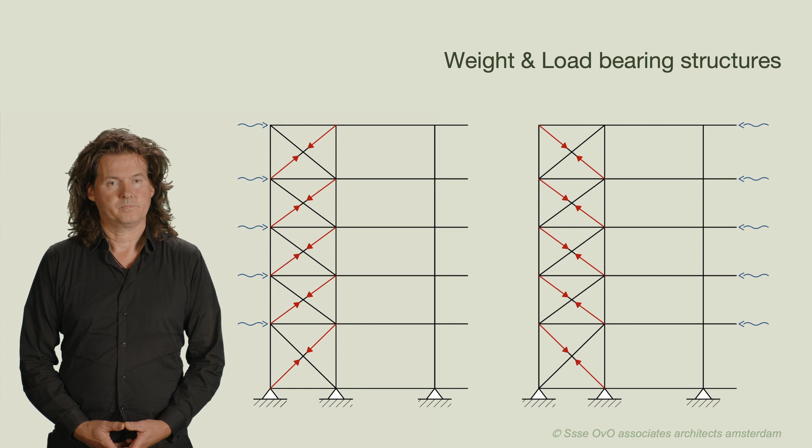Fire safety takes on a new level of complexity in high-rises. Very tall buildings have to be designed in such a way that there is a very low probability of fire spreading to upper floors and a very low probability of structural collapse at any time during a fire, regardless of whether or not the fire can be controlled by firefighting services and suppression systems.

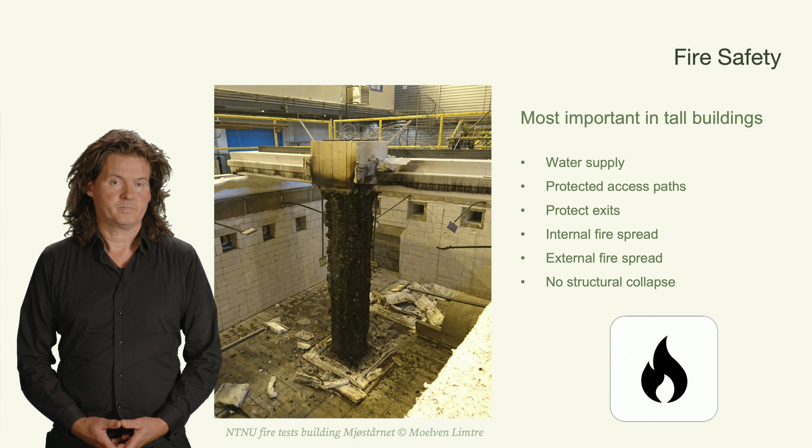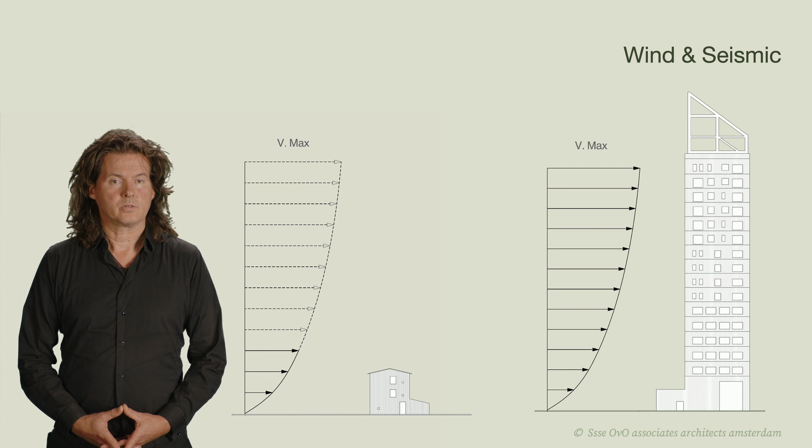In high-rise timber construction, engineering for wind and seismic forces is a major consideration. The taller the building, the more significant the wind loads, which can cause vibrations or even structural instability if not correctly addressed. Advanced simulations and material testing are essential for ensuring stability. Let's have a look at some case studies.

Treet, a 14-story timber apartment building located in Bergen, Norway. This structure stands as an excellent example of what's achievable with modern timber construction methods. In Treet, the assembly and structural systems are interlinked in an unconventional yet effective manner. Prefabricated building modules are stacked in groups of 4 stories each. These modules form the internal part of the building and are entirely self-contained. But they are not doing the heavy lifting.

Instead, the external glulam trusses, or the exoskeleton, take on the main load-bearing responsibilities. Once a stack of 4 modules is assembled, the exoskeleton is built up to receive and bear the load of the next set of 4 modules.

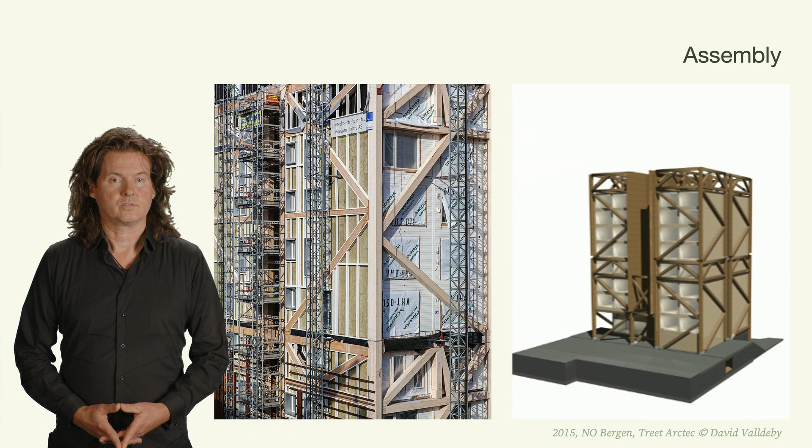The fire strategy for Treet is carefully crafted. The main load-bearing system is designed to withstand 90 minutes of fire exposure, going beyond the usual 60 minutes for secondary load-bearing elements. The 90-minute fire resistance is crucial because it ensures that a fire starting in any apartment will die out before spreading to other parts of the building.

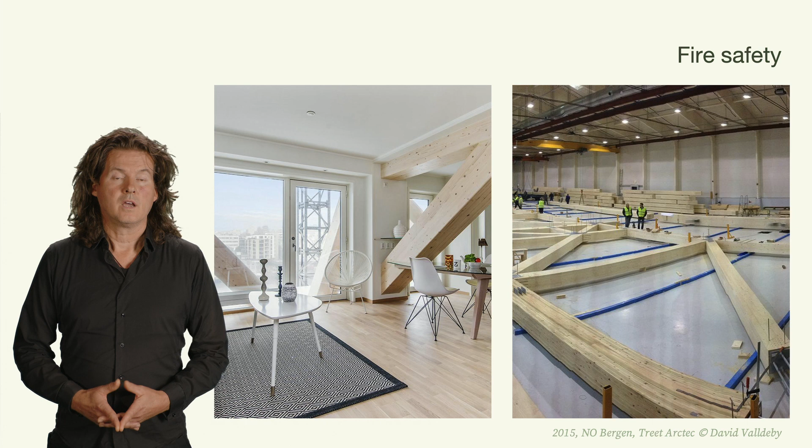Beyond structural fire resistance, Treet incorporates various other fire protection systems, such as a sprinkler system. Elevated pressure in escape stair shafts helps in containing and controlling the fire. All exposed timber surfaces in escape routes are coated with fire-retardant paint, and gaps between structural elements like beams and columns are sealed with fireproof joint filler. Let's examine a real-world example that encapsulates this principle.

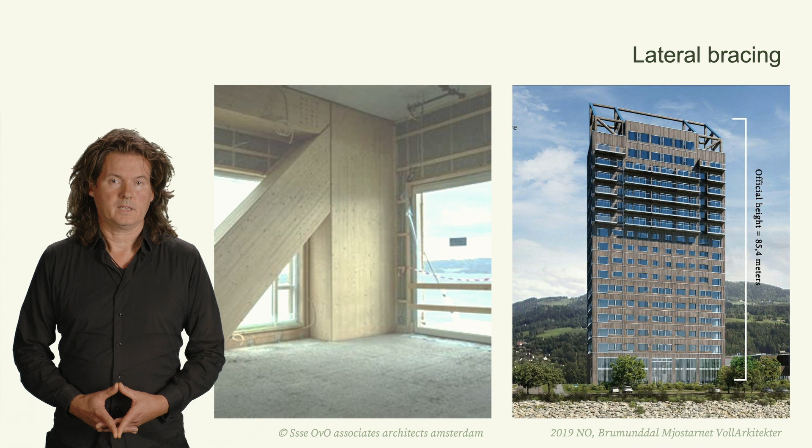Mjøstårnet is an 18-story mixed-use building located in Brumunddal, Norway. The main load-bearing elements consist of large-scale glulam trusses along the facades and internal columns and beams in the building itself. In terms of vertical loads, there are 22 columns with a maximum cross-section of 625 millimeters times 1485 millimeters. These columns transfer the vertical loads from the beams and diagonals to the foundation. These trusses brace the entire building, giving it the necessary rigidity to handle horizontal deformations and dynamic effects.

Mjøstårnet utilized a groundbreaking assembly technique that involved transporting individual pre-processed timber elements directly to the site, bypassing traditional trial assemblies. This method proved highly effective, resulting in only one fitting error among hundreds of large glulam parts. The approach expedited construction, minimized cost, and demonstrated remarkable precision, with most structures installed within a 10 mm deviation.

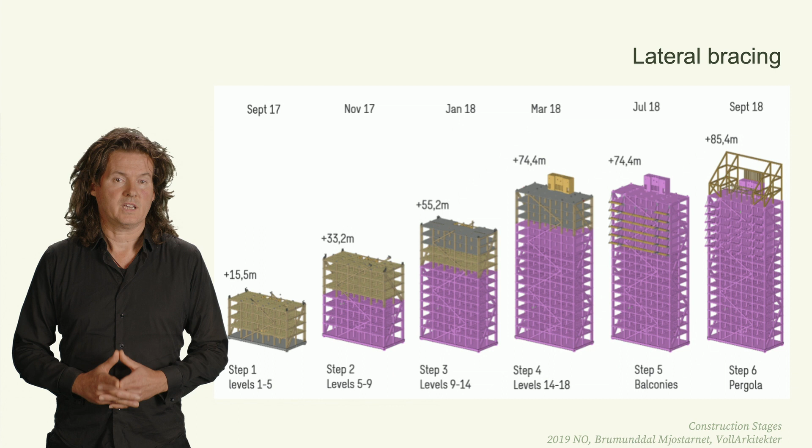Let's take a closer look at a cutting-edge project that exemplifies high-rise timber construction. The Sara Kulturhus in Skellefteå, Sweden, by White Arkitekter. This 20-story structure is one of the world's tallest timber high-rises, featuring an array of cultural and commercial spaces.

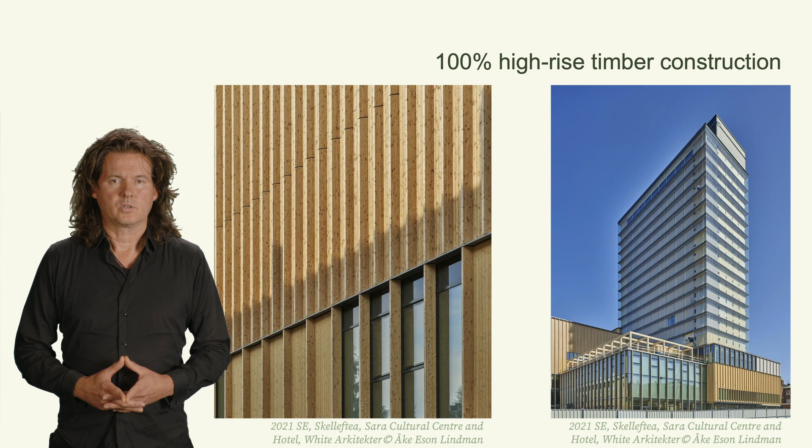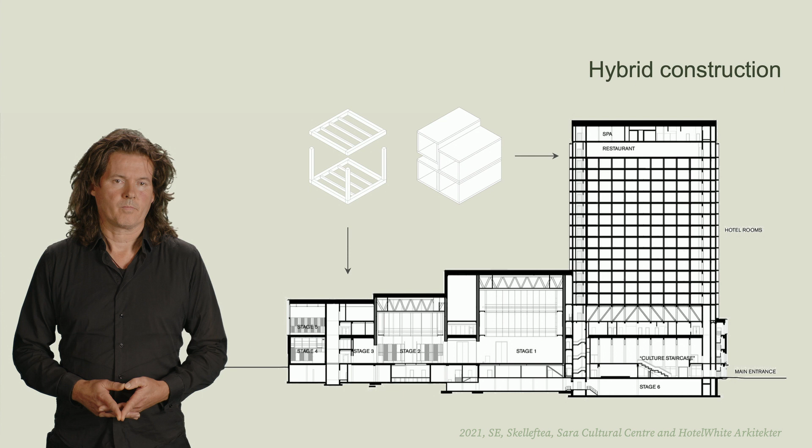The structure of Sara Kulturhus is a masterclass in hybrid construction. The low-rise portions of the building use glulam columns and beams, along with CLT shear walls and floor slabs. The high-rise portion, however, utilizes prefabricated CLT volume modules, stacked between two CLT lift cores. The design succeeds in eliminating the need for concrete in the load-bearing structure. In the image, you can see this process of the volume modules being placed between the CLT cores.

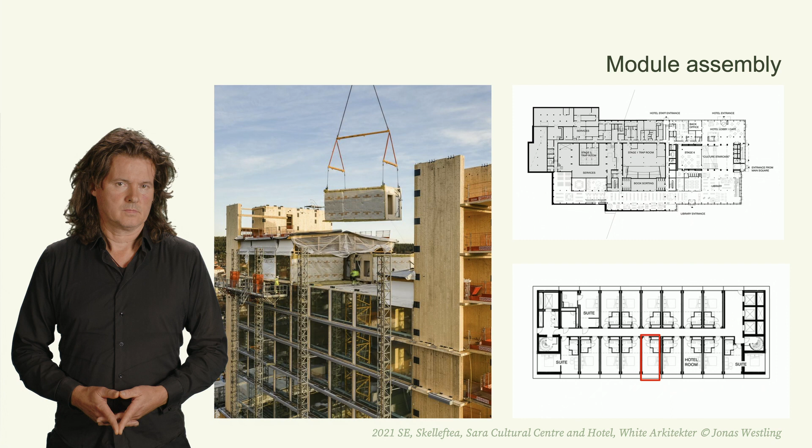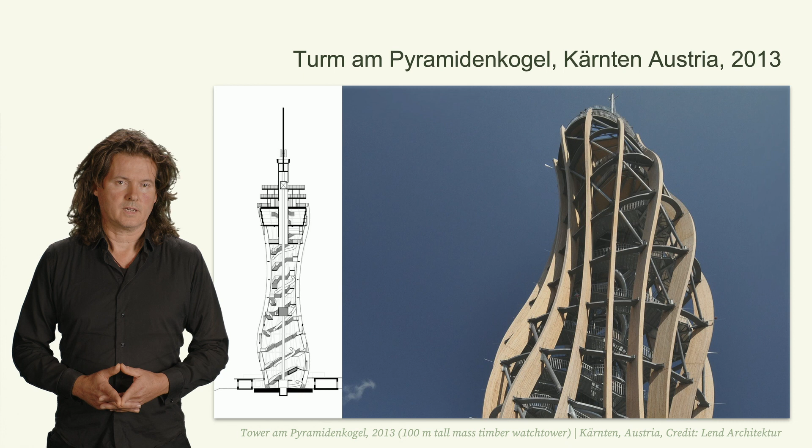As technology and regulations evolve, we can only expect to see more high-rise timber buildings that challenge our traditional notions of architecture. Tall timber refers to timber buildings that go beyond the established high-rise standards. Generally, a high-rise building ranges up to about 30 stories. Anything beyond that, constructed primarily with timber, falls into the category of tall timber. This term is pushing the boundaries of what is traditionally considered possible with timber construction.

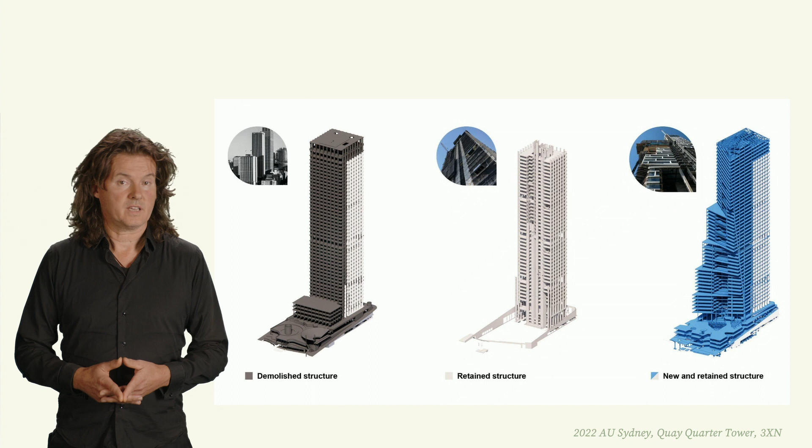Now let's journey down under to Sydney's Quay Quarter Tower by 3XN, a marvel in adaptive reuse. This 49-story structure stands tall at 206 meters and offers 89,000 square meters of floor space. The tower retains 65% of the original AMP Centre structure, including beams, columns, and slabs, and 95% of the original core. This effort saved an astounding 7.3 million kilograms of embodied carbon.

The W350 plan by Sumitomo Forestry and Nikken Sekkei is a glimpse into what the future could hold for tall timber structures. Scheduled for completion in 2041, the project aims to construct a 350-meter tall wooden building. This effort underscores the ongoing research and long-term vision that industry leaders have for the future of timber construction.

What if the Empire State Building had been constructed from timber? Michael Green developed research in which he shows how the Empire State Building could have been built with timber. What if New York's skyline was predominantly made of timber? What would that look like?